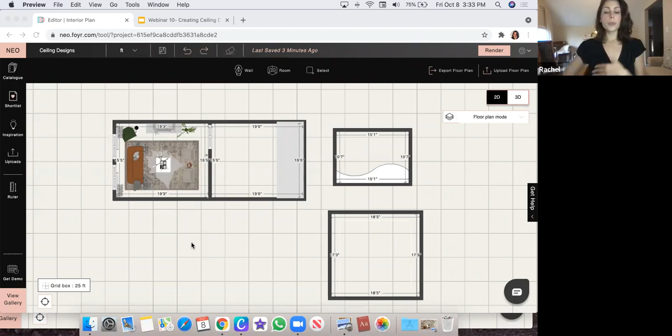So what that means is that in 2D mode, we need to accommodate for the height of that, in this case, cathedral ceiling, but really the height or thickness of any ceiling design in our wall height, which we set in 2D mode. So let's say that from floor to the bottom of this cathedral ceiling is 10 feet, and then from the bottom of the cathedral to the peak is 6 feet. So you need to know the measurement from here to here, and then the measurement from the floor all the way to the top, and you add those two together. So in this case it would be 16 feet.

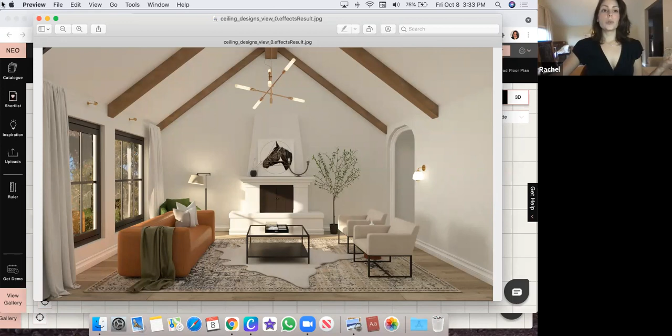We're going to select this wall here. That's going to bring up our wall property window, and the very first option is to set your wall height. So while it's in full wall, you'll see that the changes will apply to the complete floor plan. So even though I've only selected this wall, every wall on this grid right now will increase to 16 feet, which I've already done here, but you can just enter that in whatever number that needs to be. Next, you can go into your catalog and go to building and search for ceiling designs here.

You can narrow your search up top if you want to. Save any items you might want to use to your shortlist, or you can just add them directly to the project. I'm going to show you how to apply this in 2D mode.

You can do it in 2D or 3D, it doesn't matter. Right now we're in floor plan mode, so we're looking at all of our floor docked items and wall docked items. If I go to this drop down and navigate to ceiling plan mode, you'll see those items disappear.

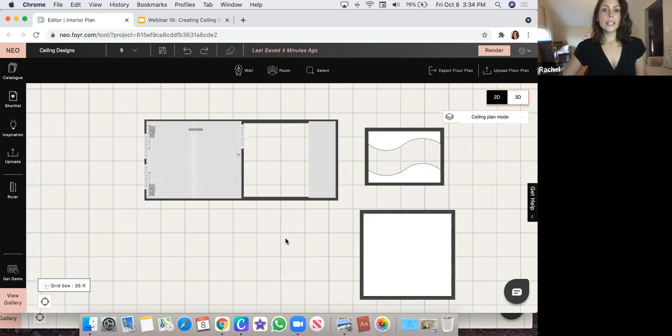If I select here, I have this cathedral ceiling. So what you do is a simple drag and drop over top, then a resize. I like to do this in 2D mode because it's really easy to fit it nice and snug up against the wall. But again, you can do this in 3D as well.

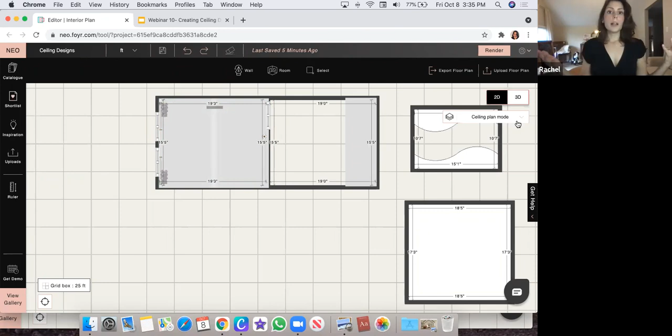While we're in ceiling plan mode, we can apply anything that docks to the ceiling, like lighting or a ceiling design. If we navigate back to floor plan mode, we're no longer looking at the cathedral ceiling, we're looking at our floor. It's just a matter of what perspective the software is giving us.

Let's go into 3D real quick, I'll show you what this looks like. It's just going to take a second to load. You'll notice that in the catalog, this was all white, but I was able to apply a wood texture from the catalog to these beams to create some definition there.

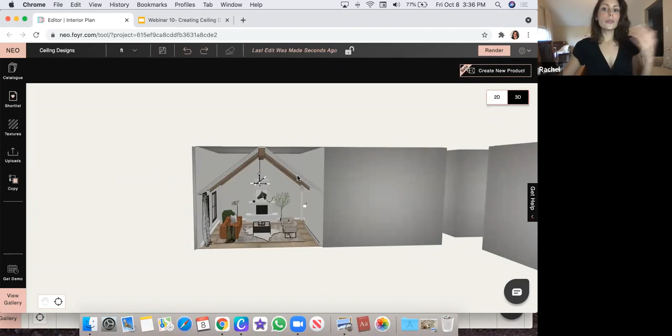Here we are, and you'll notice this is what I'm talking about. It's docking from the top of the peak and dropping down into the space, which is why we needed those tall walls. Even though we have these little cat ears here in 3D mode, when we take a render inside the space it does not show. We just want to make sure that when we resize, we can check in 3D mode that the edges are all really tucked into place flush against these walls so there's no gaps.

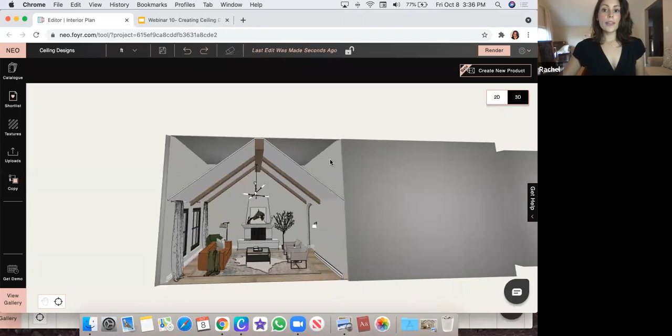So that's how you do something like a cathedral ceiling. Set your wall height in 2D mode, then drag and drop either in 2D from ceiling plan mode, or you can do it in 3D, resize, and then apply textures as needed.

This light fixture, when I first dragged it in, all chandeliers are going to want to dock to the ceiling. So I simply put it into free movement once it docked to the ceiling and then brought it down so I could attach it to this beam rather than to the ceiling above.

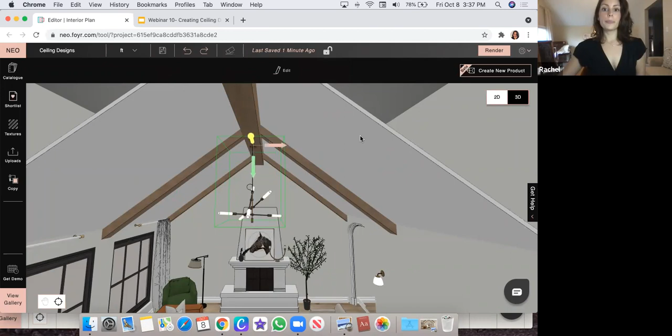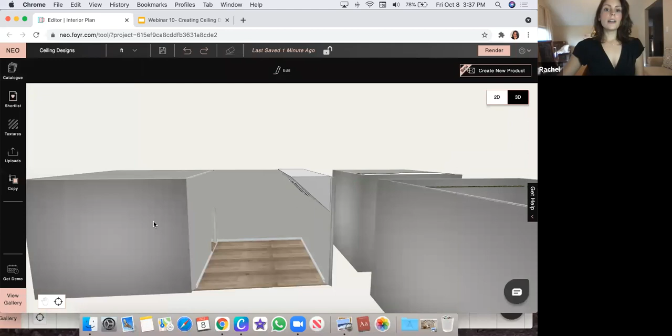Speaking of ceiling designs, or rather, I believe it's under skylights - on occasion I've seen people bring their roof, or whatever it may be, and have it sit on top of their floor plan. Let's use this guy as an example. This would not be appropriate for anything that's a peak, because the ends of those peaks are going to expose the outside environment.

Let me grab this guy and show you what I mean. If I pull this up and sit it all the way on top, and say, okay, I'm going to have my walls be 10 feet, and then sit this on top and apply invisible material to the roof or ceiling, which I'll show you in a second, the problem is that then all of this on either end is exposed.

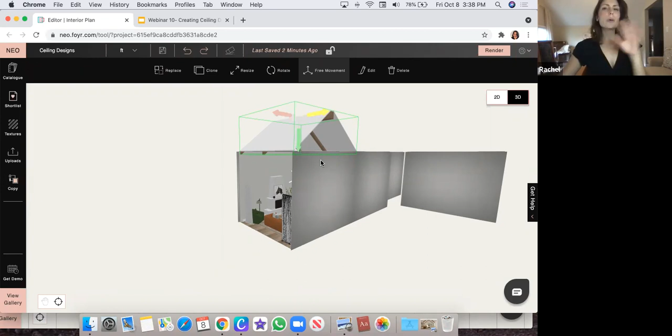So you would have to go into the catalog, find a triangle, and resize it to fit in here to cover that up. So in this particular case, this is where you definitely want to have it drop in, and you don't want to have it sitting on top.

However, in the catalog we do have some options like this. Let's say you're doing an outdoor, almost like a greenhouse situation where you have a bunch of windows lined here. These options - let me drag and drop one.

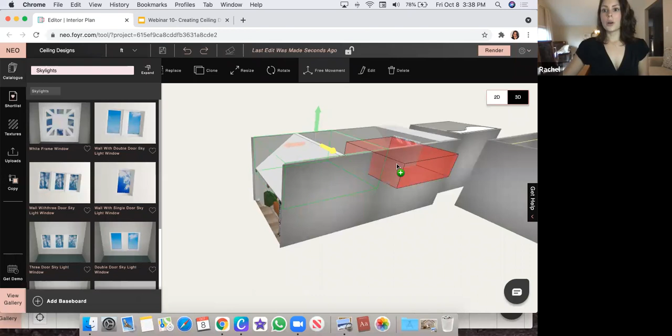Let me just get into the space here. I'll show you guys the skylight in a second. So let's use this one. It's going to dock to the ceiling, it's going to drop down.

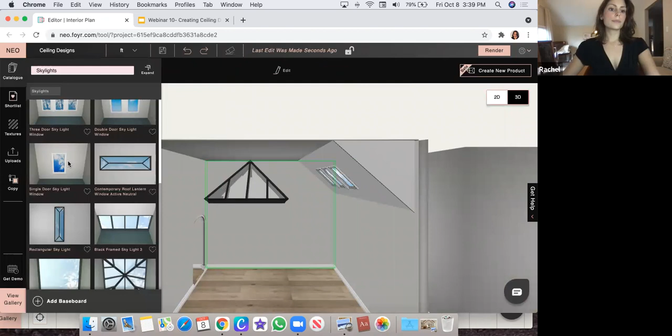And now this is a good time to grab your invisible material from your texture catalog. This guy right here. Drag and drop it, and then resize this over top.

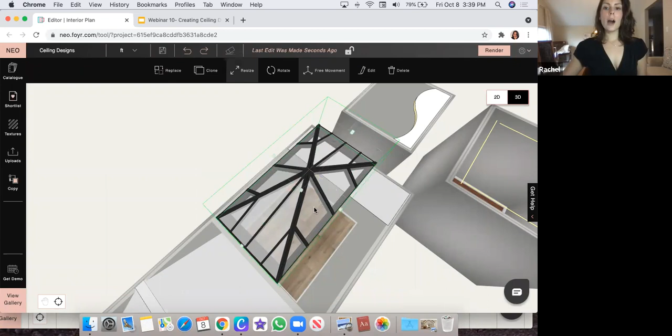So it depends, we're just going to ignore this skylight over here for a second. Pretend that's not there, because this fits nice and snug over top of these walls and doesn't leave any of those weird gaps that the cathedral ceiling left. This would be a time where you could absolutely just keep your wall height, whatever that wall height is, and then just sit this right on top and use invisible material to see through it so that it looks like just one continuous open air space.

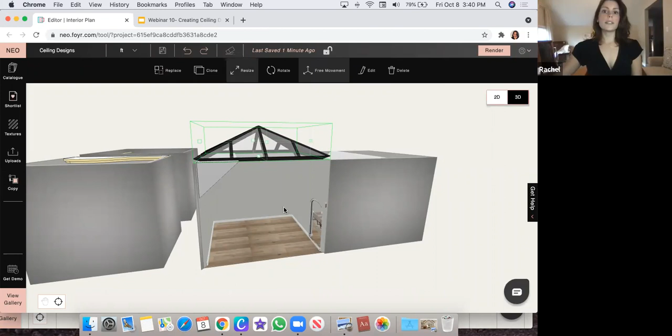And I just put that into free movement to lift it up. Okay, let's delete this. I'm going to just apply a color to this wall.

And let's talk about the other skylight options. So that was in when I searched for skylights. Previously, what we would have to do is we had some skylight options that looked like this, let's say. And I'm going to show you how to work around this in a second. It would dock to the ceiling, but it wouldn't see through the ceiling.

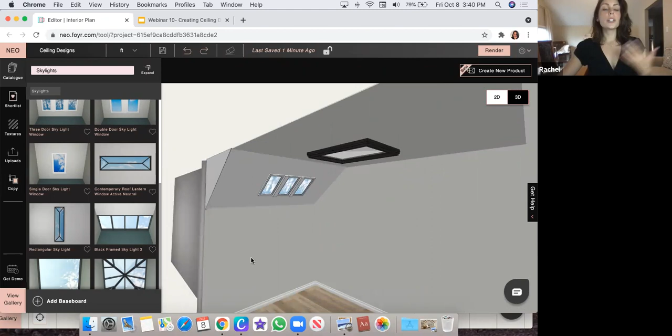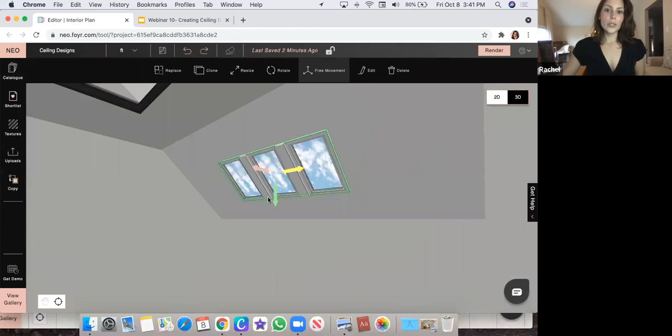So we would have to make this invisible and then use create new product, which we can still do with this. But that was becoming problematic for designers, particularly in the UK, I found, who had a lot of slanted ceilings like this that had skylights worked into them. And it was a process. So the product team very smartly came up with skylight options that have the blue sky and clouds as a texture that's applied to the window pane to give the appearance of the outside.

So what I've done here is I've used geometrics to create a slanted ceiling, and this is just a triangle. So if I go into my catalog and search triangle, this is part of the larger category called geometrics, which is just a number of different shapes that you can resize and apply textures to.

I would get the right triangle, which is here somewhere, drag and drop it into the space, resize it. Here it is. I used this one, it docks right to the ceiling, and then I just resized it across.

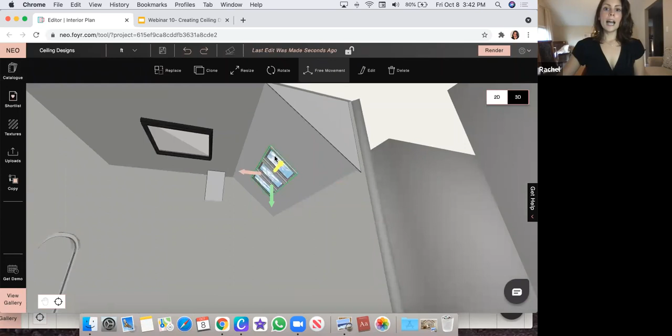Then I grabbed my skylight, put it into free movement. And then once you put something into free movement, if you click on rotate, you can rotate in any direction as well. So then I just rotated it so that it was flush up against here and put it into place. So now it's giving the appearance of seeing through this rectangle or triangle, even though it's not.

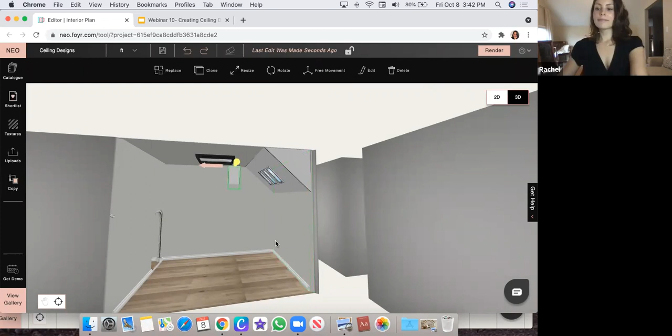I'm not sure that the words I just said made total sense, so let me know if they didn't, but that's how you would do that. So we're giving the appearance of this.

One thing that's also nice is that you can copy texture material of this sky and clouds now. So if you wanted to apply it to the ceiling, you could apply it to this other skylight like that. So copy texture material, go and pick up the texture that you want, and then click on the thing that you want it to be applied to.

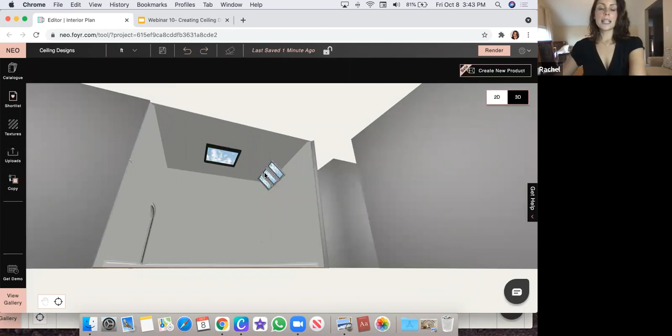If you want the actual sun in render mode coming in through here, let me just delete this to get it out of the way. What you would do is use create new product. So we're going to drag and drop invisible material to the ceiling so that the skylight sees through. Then we're going to go into create new product, and this is really simple.

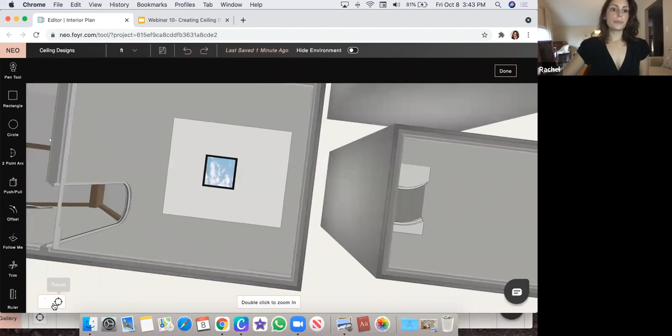We're going to grab our rectangle tool and we're just going to trace over the entire ceiling. I'm going to start in my corner. There we go, it's going to snap me into these edges and into the corner for me, which is helpful.

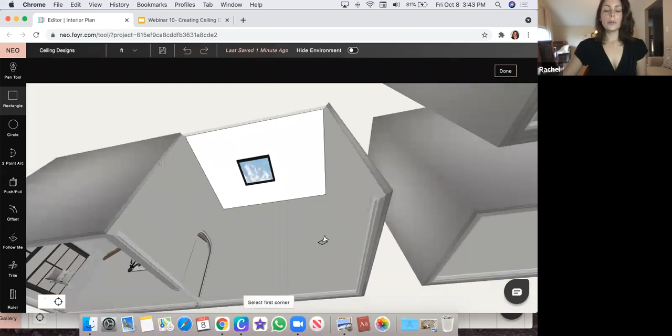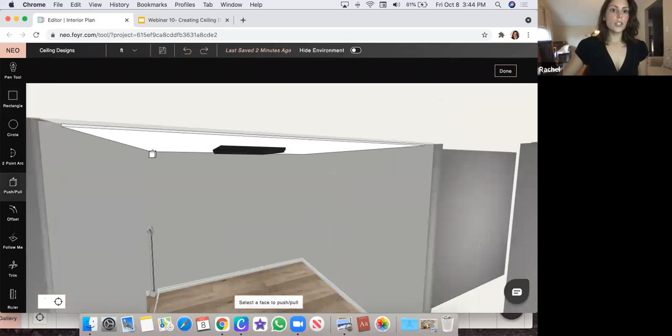I'm going to look at it from the side like this, and I'm going to use push-pull just to give it a little bit of depth, and I'll explain why in a second. So even just 1 inch is fine. The reason for that is because once I give this rectangle some depth, it becomes a 3D object and creates these edges. Let me just exaggerate this for a second. It creates these edges that now I can push, pull, and manipulate each individually.

So that's going to be important because now the next thing I'm going to do is trace around this skylight. I can use the rectangle tool or the pen tool. The pen tool draws singular straight lines, and the rectangle tool draws a rectangle or a square in this case. So I'm just going to click, move this out, click again.

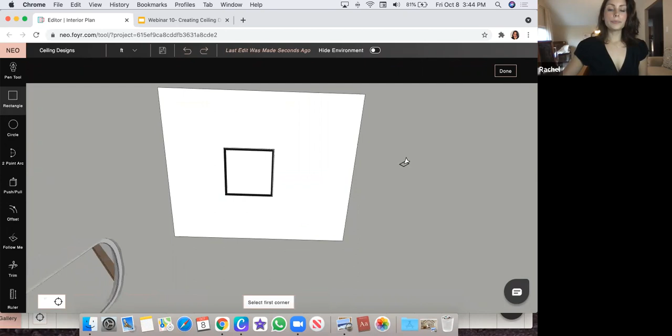Now I've defined that space because I need to make a cavity so the skylight can see through. We're going to go right back to push pull. You'll notice that now because I've defined this, it's a separate plane that I can manipulate, and I'm going to push it up and push it away. So now I've made my default ceiling invisible, and I've created like a faux ceiling that sits down on top of it, creating the cavity for the skylight.

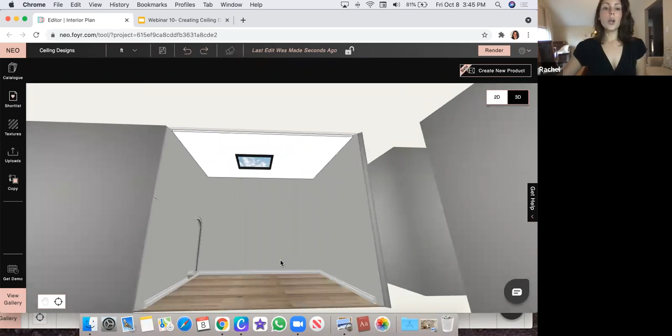I still have this sky texture that we applied, but you could keep this totally clear and it would see out and take in sun for the render. So that's an option there. When we click done, we're right back in 3D mode, and now you can apply your ceiling paint color here.

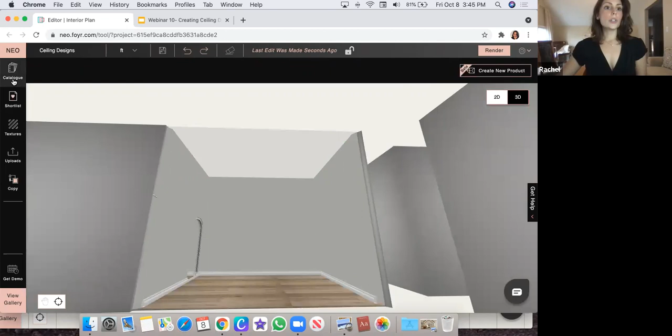One last note about skylights is that they're not all the same - the 3 that I showed you earlier were just windows. Some of these also include wall, which makes it almost easier, I think.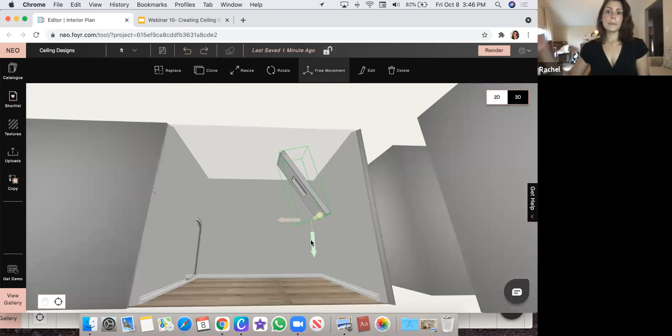So if you have a smaller space, you could work this straight up. It's already at a nice angle for you, but you can, of course, once it's in free movement, click on rotate and rotate it into place as needed. And then you can even just clone these and put them side by side.

And again, it's got that nice texture applied to it so that you don't run into those issues. We used to have to make the wall itself invisible and then create like a faux wall underneath the slant. For any of you who've had to do this in the past, you know what I'm talking about - it was really tedious. This is a nice workaround.

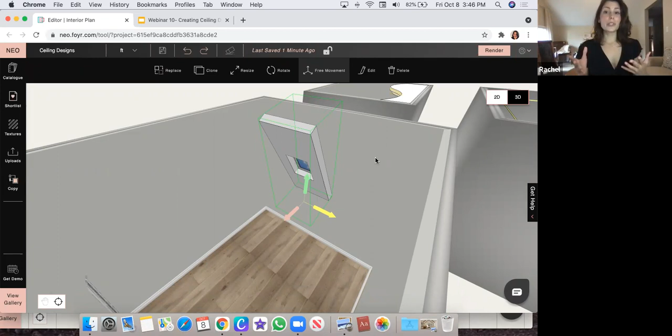Let me know if you guys have any questions about that. In the meantime, let's go on to tray ceilings.

So here in this room, I'm going to show you how I created this tray ceiling, which I took a quick render of so you can see. We have tray ceilings in the catalog, and a lot of them are more ornate. So if you wanted something a bit more modern, you could create it as a new product.

And I'll show you how to use a tool called Follow Me. Some of you, if you were on the Create New Product webinar a week or so ago, may already be familiar with this. If not, I'll show it to you today. We're going to create this tray ceiling and create this little lip or edge, and then I'll show you the lighting tool I used to light it up.

So this is what this looks like as a render.

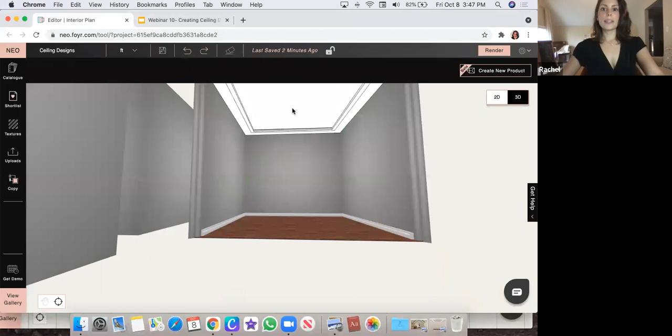Okay, I'm going to delete this. You'll see I've got my light strips - I'm just going to keep those there for now, actually. And once again, I'm just going to double click here and we're going to head into Create New Product. So just like we did earlier, I'm going to start by just covering the entire space, the entire ceiling.

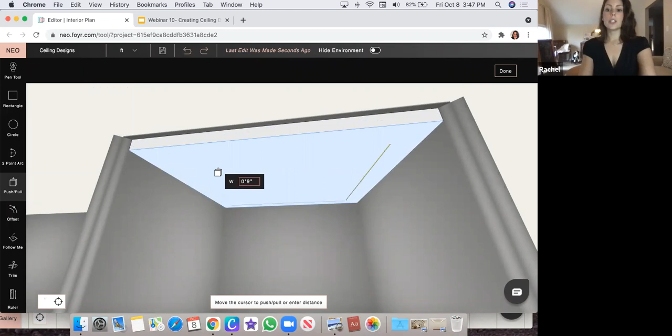Click and click again, and then once again I'm going to give it some depth using push-pull. I'm going to bring this down. You can, of course, always set the dimensions specifically - so say this just needed to be 8 inches, you could enter that and click enter.

Now what I need to do is create a border, so offset is the tool that creates borders always. Doesn't matter what shape you're working inside of - it could be an irregular shape, it will create an exact replica of that. You just click once and then pull your mouse out and click again.

And because I've defined this, it's now 2 separate planes that I can manipulate with the push-pull tool, which I'm going to do now. So I'm going to grab push-pull again, and I'm just going to push this up ever so slightly.

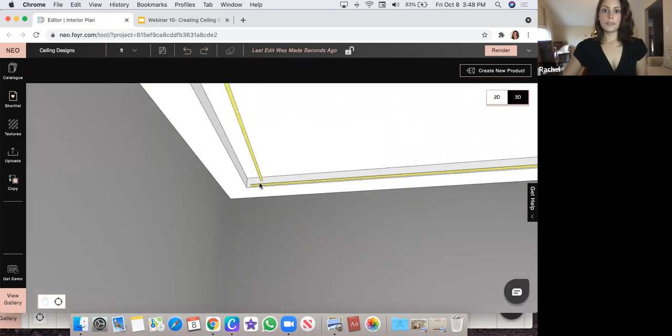Okay, so here is where we start to use Follow Me. I'm just going to double click into this corner. And you know what, let me delete these guys because they're in the way.

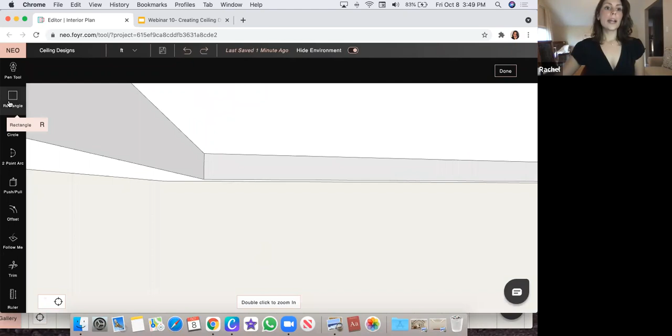Okay, so the next thing you need to do to create this little lip where we're going to hide that light strip you just saw - the first thing we're going to do is define the shape by grabbing our rectangle tool. You'll notice that using create new product is just a repetition of the same tools over and over again.

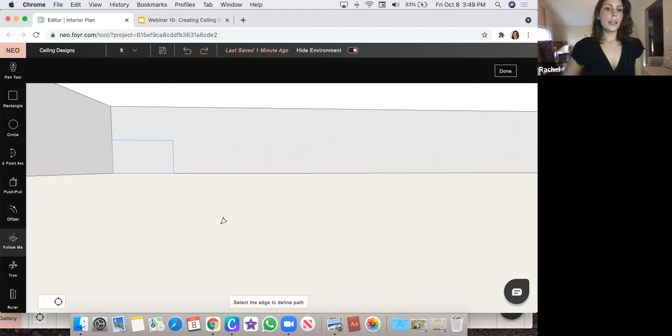I'm just going to draw a little rectangle here. Now I'm going to grab follow me, and click on that square. You'll notice it's going to give me some guidance. If I hover my cursor over here, that line is turning red, saying hey, you can't follow me over here. But if I hover over here, I can follow over there. So I'm going to click there and you'll see that's created a little lip. Then I'm just going to go around the entire border, and now I can do this switch. There we go, so I'm going to click done.

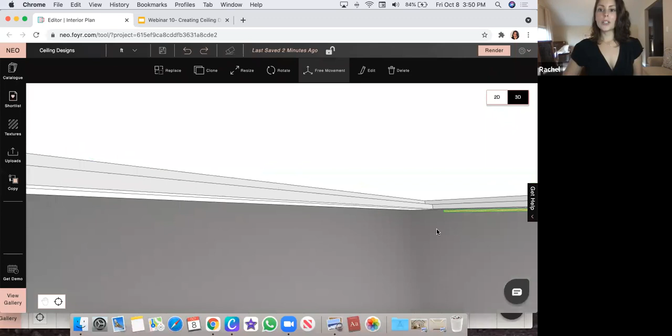Clearly losing my voice today, I apologize. I don't know if you guys can see that, but there's this nice little step that's been created using the follow me tool. We can also use follow me to create this type of ledge on like a curved ceiling design, so I'll show you guys that next.

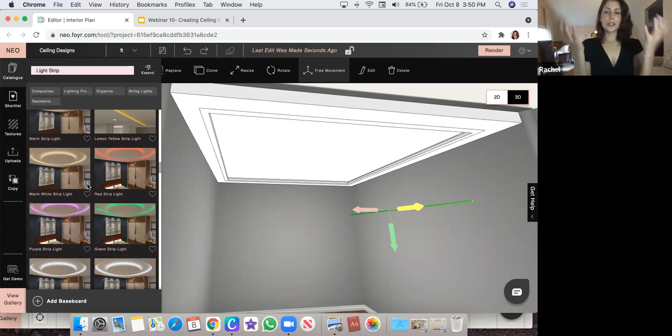So now what we're going to do is apply some lighting, and I used this light strip here. In the catalog, if you search for light strip and click enter, you're going to get all of these different options. These guys that are kind of in this disc - it's a little confusing maybe because it looks like they're round, but they're not. They're just straight and they come in white light, warm light, whatever you need. Drag and drop it, it's going to look just like this.

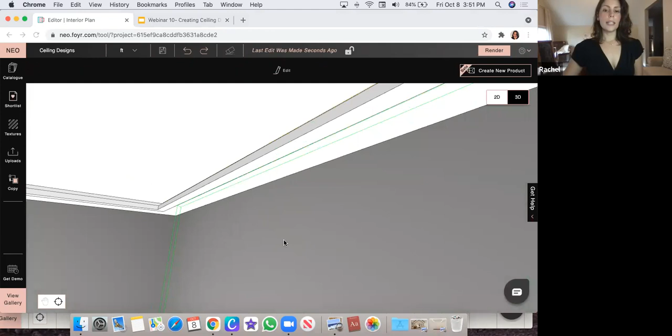Then you're going to bring it in and simply resize it along the length and tuck it into that little ledge we've just created. Just going to zoom in here, and then I would just set it right in there. So now we'll get the benefit of the light we saw earlier without actually seeing it. Then I would just clone that light strip, bring it over here, clone it again, rotate it, and tuck it into each of these corners or each of these edges.

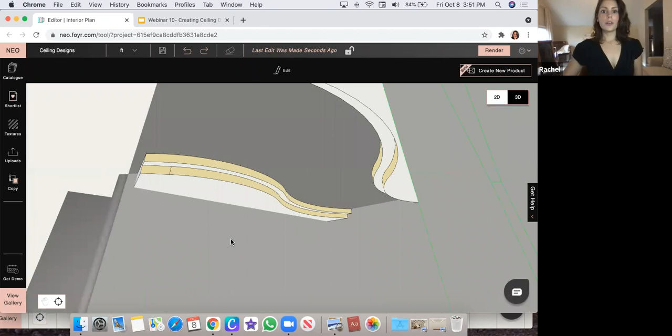Alright, next is a curved ceiling design and how we would use it. So I created this little guy here - I just created this one and then I cloned it and did a horizontal flip, so I'll show you how to do that. But I used the follow me tool to create a little ledge, and then I just dragged and dropped light texture material from the texture catalog. In the texture catalog we also have light. So in the regular catalog you're going to get the strips, but those we can't bend. Here in the texture catalog we can just apply light texture to edges, which is what I've done here, using this low intensity warm light. We also have white light and tons of neon light.

Okay, alright, so let me show you how we did this. I'm going to delete this and go back into create new product. The first thing I'm going to do is define the outer border using my rectangle tool, and then we're going to create that curve. So I'm just going to click and click, once again give it some depth. It becomes repetitive.

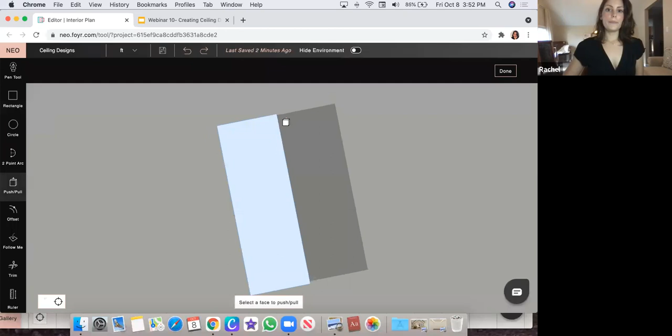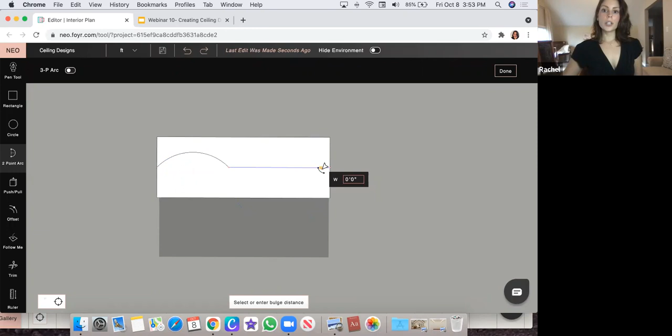Now let me look at it from this direction. We're going to use 2-point arc - this is going to create a nice curve. Just going to find my midpoint here, click, drag out my mouse, click again. As I move my mouse up slightly it creates that kind of bulge, so I'm going to click again. Then I'm going to pick up where I left off - click, and then once I hit the edge, click again, and move my mouse down so I'm creating that in the opposite direction. And there we go.

So now that we've defined these as two separate spaces, what we can do is slice away at the one using push-pull. Oh goodness, I just got lost - hold on one second. There we are.

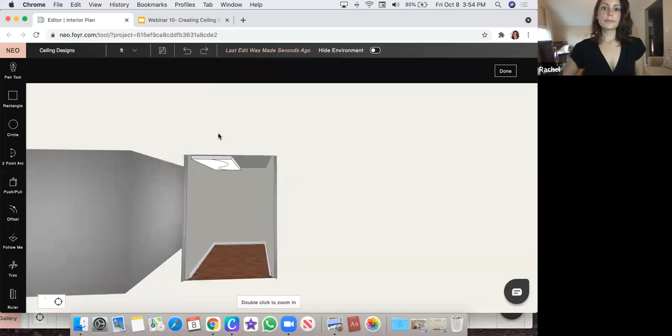So you can slice away at it entirely. Now we're going to create that ledge. How I'm going to do this is the same basic process. I'm going to define what the size of that indent needs to be using the rectangle tool, and I need to do it along this straight edge.

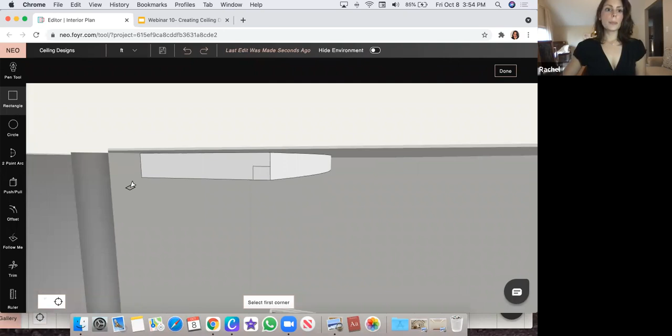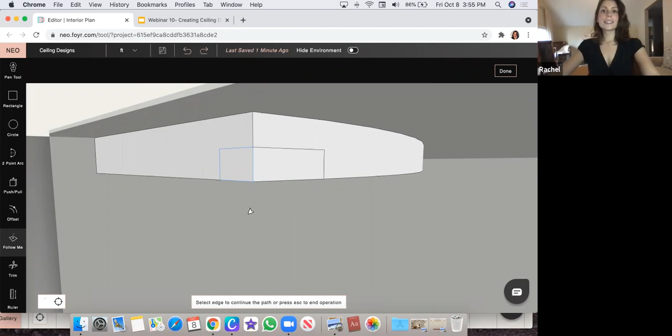Now I'm going to click on follow me, select that rectangle, select this edge, which turns blue. Now I've told the software, okay, that's the curve that I want you to follow. And now I'm just going to click the escape key, and when I do that, it does it for me.

So that's a little different from the tray ceiling. In the tray ceiling, we had to click on each edge and it followed me around. For the curve, you're just clicking on the edge right here, and then clicking escape, and the software will take care of the rest.

Now, when we click done, we're back in 3D. We can manipulate the products that we've created and create new products in the same exact way as anything else from the catalog.

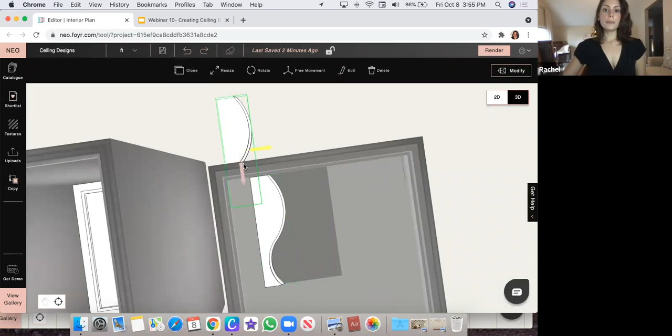So we can resize this, we can clone it, and we can flip it by going to edit and doing, in this case, a horizontal flip. Or you could do a vertical flip, side to side or front to back. Usually vertical should flip front to back, and horizontal should flip side to side.

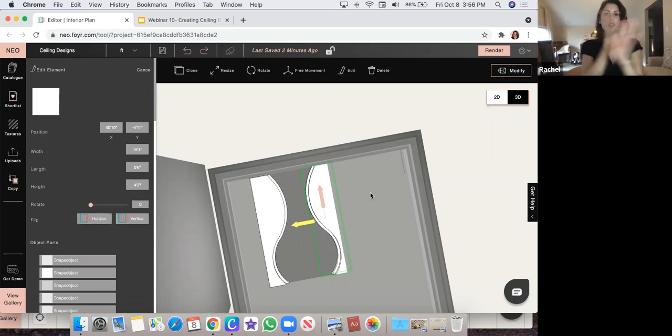This is a really useful tool in general if you have a door and the knob is on the wrong side, or if you have an open door that needs to be opening into the room, but it's opening out. Do a vertical flip and it'll open into the room.

So now I've created kind of this cool little vase shape, and now I can drag and drop that texture to the inside here and apply any other textures to the different planes. There we go.

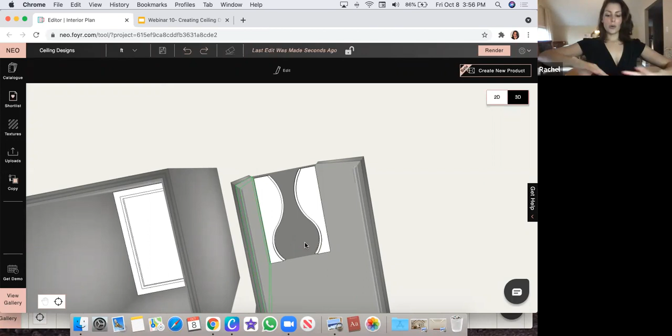I just realized this would be really cool to put on a floor. You know how they sometimes have floors where it's like overlooking water and they have the epoxy over this area? I don't know if you guys know what I'm talking about, but that would be a really cool way to create that design on the floor.

So we went over setting our ceiling height in 2D mode to accommodate for ceiling designs that are really going to drop down, like a cathedral ceiling, and when to use invisible material, like with that kind of greenhouse skylight roof where you can just set it right on top.

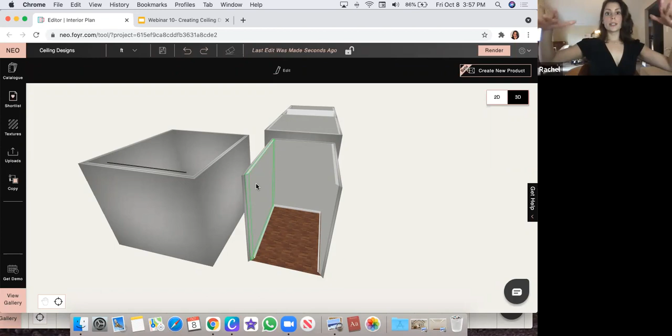Applying your ceiling designs in 2D mode under ceiling plan mode here, which now we can see all of those that we just created. How to apply the new skylights, how to use the old skylights by creating the invisible ceiling and then using create new product to just slice around it.

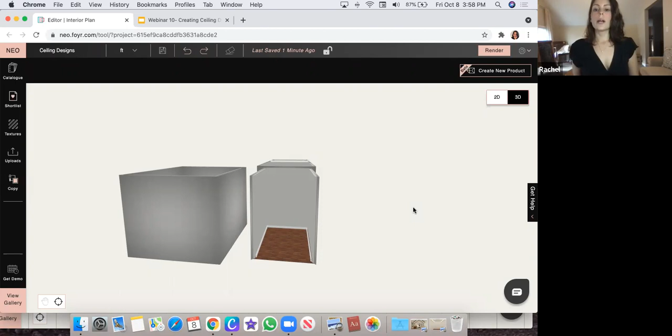Okay, let's see. Mariette is asking, if we use this technique, can we still use the sun effects through the skylight? I mean, if we use the texture to make the skylight look real, right? Okay, so with the slant, I'm assuming.

Can you do the tray ceiling one again? Sure, okay. Alrighty, so...

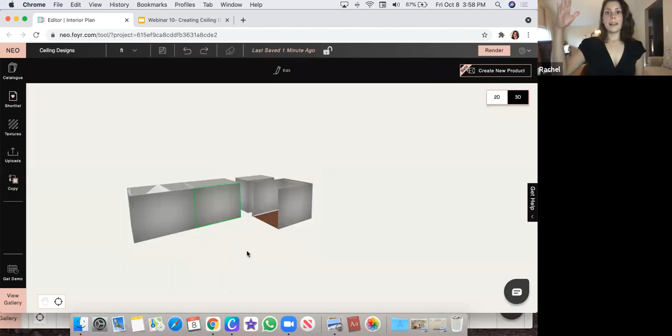It will block out because we're not actually adhering it to a window. That skylight is not going to allow light in. We can compensate for that by adding artificial light.

So let's try this out together. Let's make that like that. I'm going to go into the texture catalog, or the catalog, and find that triangle, and then we're going to replace this.

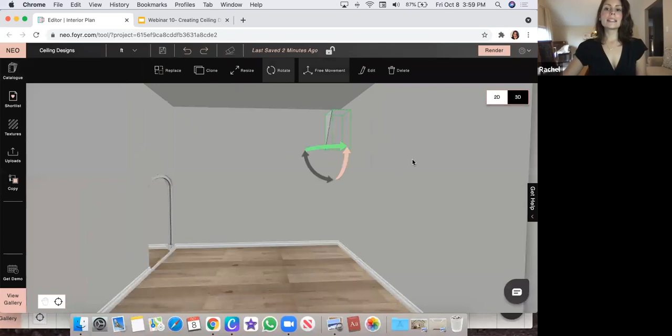Using the light textures from the texture catalog that I just showed you is always really useful. Kind of think of it as a photographer's tool, right? When a photographer is taking pictures of anything or anybody or an interior space, they always bring extra lighting tools with them. That's essentially how we can use those light textures, which I'll show you in just one second.

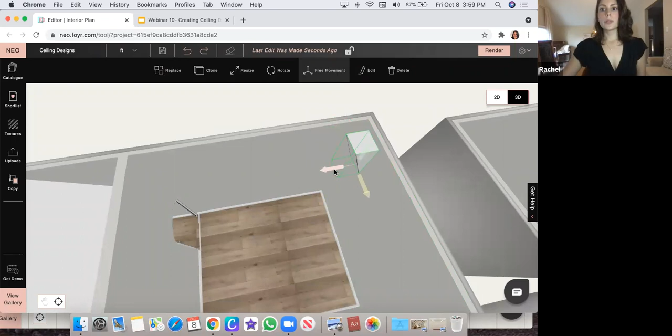So let's reapply this. I'm interested to see how this renders if we were to apply, rather than the sky, if we were to replace it with a light. It might emit too much light, but let's give it a try.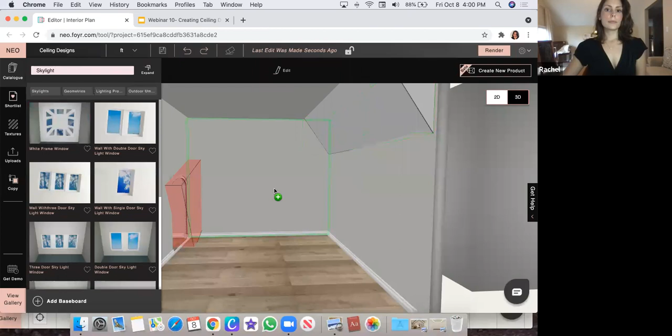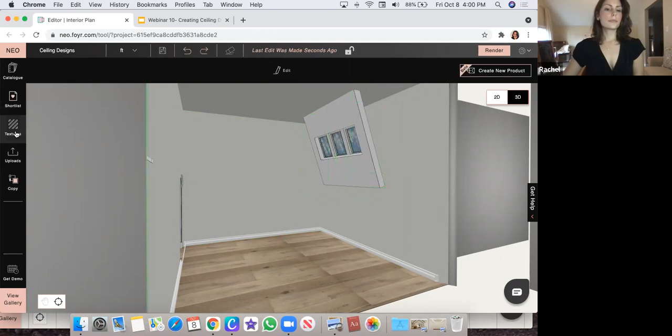See what this guy looks like. You know what, let's just do that. Let's just apply it to all of them. Let's see how this renders real quick, take a quick render preview. I don't know if it's going to be too harsh. The warm light might be a little too harsh.

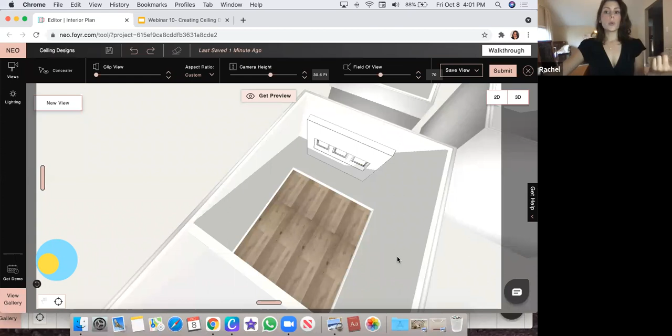Maybe the low intensity white light would have been a better option. Or sometimes what I'll do is, if I'm focused on taking a render of this wall, I'll apply a wall docked cube to it, apply either the warm or white light to the cube, and resize the cube. That provides additional light into the space so it's not too dim.

In the meantime, let's get a quick render preview here, and then I'll show you guys how to do that tray ceiling again. Gosh, such a tiny room that I chose to work in. Okay, let's do that. Alright, let's go back to 3D mode. I'll work on the tray ceiling while this generates, and then we'll answer any more questions.

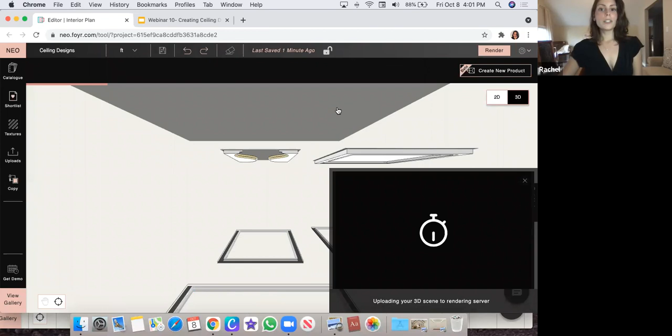Let me know if that made sense about the wall docked cube with the lighting being applied to it as an additional light source, or if you want me to show you an example. Okay, so tray ceiling.

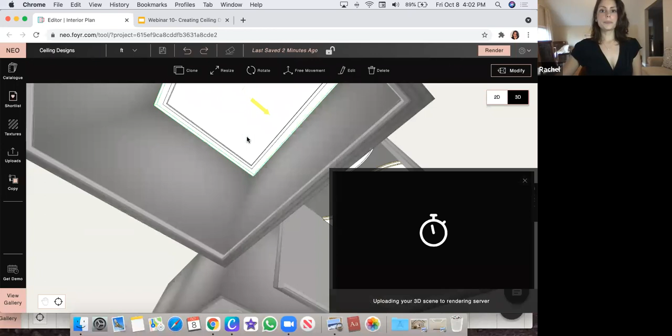I'm going to delete this, and we're going to go into create new product. The first thing we're going to use is the rectangle tool, and we're just going to draw our rectangle over the ceiling. We're going to use push pull to give it a little bit of depth.

This is an example where, if you know the tray ceiling is dropping down a certain amount, make sure the ceiling height in 2D mode accommodates for that, so it's not crowding the space in a way that's not realistic to what you'd want. So we'll bring that down 8 inches for now.

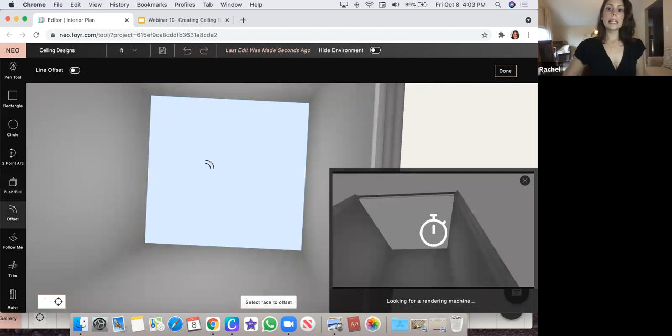Then we're going to define the border of where that tray is going to be. Borders are created using offset. I'll simply click once, move my mouse out, and click again to mark it. Then I'll use push pull to push this up just a tad, and now I've created that little ledge.

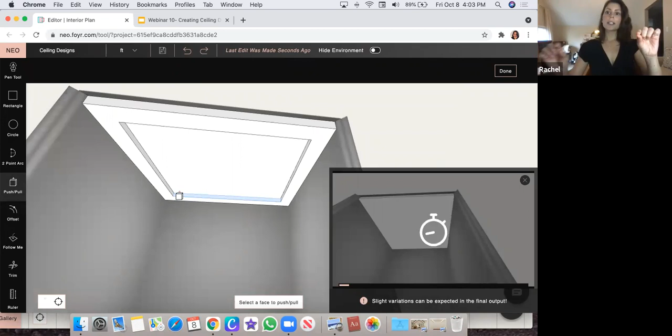That little ledge is where we're going to use the rectangle tool again to define where we want that lip to be. I'll double click here to zoom in, grab my rectangle tool, and draw that out here, then zoom in. Okay, now I grab follow me.

So that's a little intense, right? You see this render preview, so probably not the best option. What I'd recommend is blocking the light, using some artificial light with that wall docked cube, and see if that works for you. You could also try the white light here, but it would probably have the same effect.

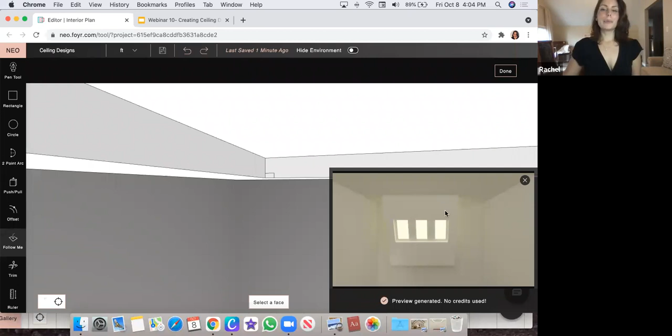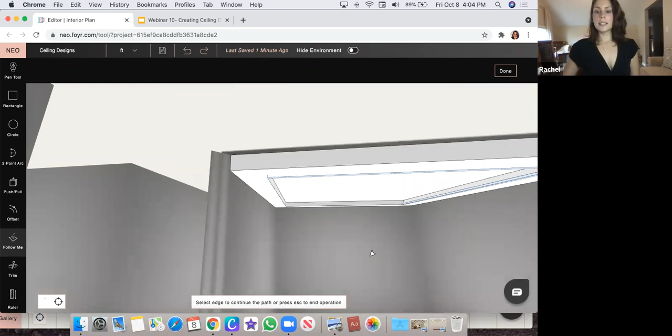Okay, back to this real quick. We're going to select the rectangle and then select the next edge, clicking all around. It'll highlight blue; if you cannot select it, it will highlight red, which usually just means you need to go to the other edge. And there we go, now it's created that little shelf where I can tuck away.

Here's a good view of my lighting, my light strips, so that they're not seen. Okay, let me know if that helped, seeing that again.

Alrighty. Did that help, Latricia? Okay, awesome, great.